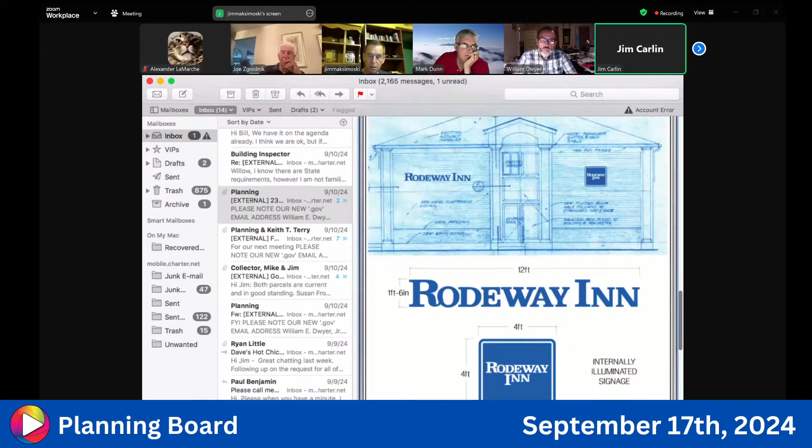I thought that's the old Rodeway. Yeah. I think the new one's more horizontal, as I recall. The new one is a quantity of one sign on the building at 37 square feet, and one road sign at only 25 square feet.

The road sign, we're still seeing. Can you see it? We're still seeing the old Rodeway.

I got two computers. I got a Mac, an Apple, and then I got my regular, what you call it, IBM compatible, and I'm not used to the Mac, so. Yeah. I've got the other two, but I'd have to figure out how to turn them.

They're 90 degrees. Okay, now can you see the Rodeway sign? I mean the TownePlace sign? Yeah. You see the TownePlace road sign? Yep, yep. And that's 5 foot by 5 foot.

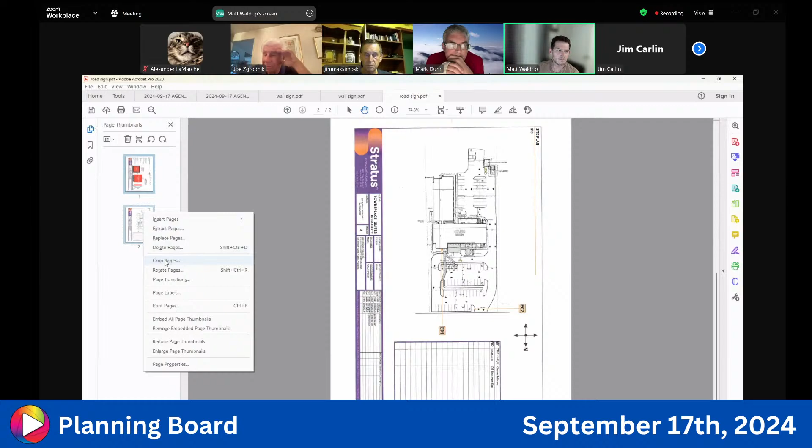Okay, yep. Give me one second. I'll open that one. Okay. Is that it? Yep. 5 by 5.

Oh, sorry, hold on one second. One's internally illuminated at 25 square feet, correct, Jim? Carlin? Yes, right. And there's a note on it, setback from street 35 feet 6 inches.

No, that was when the other street was there and we were taking photos for a survey and we put a stake in there. So they could do a little sketch and also a dig safe stake. So can we just confirm how far back from the street you are? 15 feet, 15 feet from the right of way. Yes.

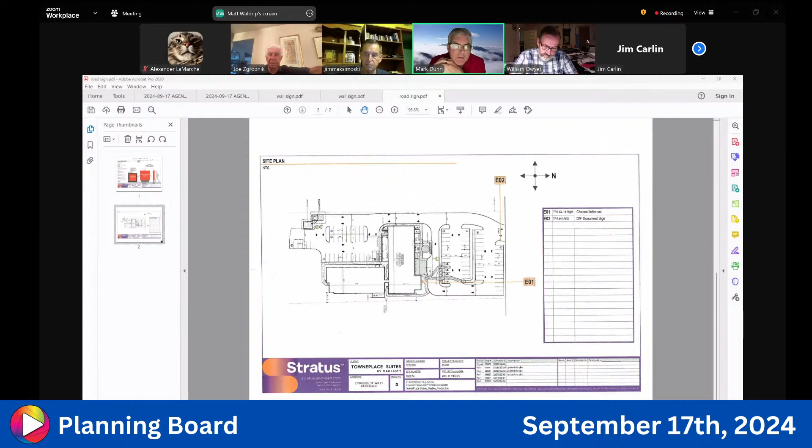I'm just the middleman. You know, where's that elevation? That's back in the wall sign. I don't know if you can jump to that one, Matt. The other tab. Yeah, we can scroll up to, so is that below the roof line?

It's like it might be too high. Well, there is a roof there. Oh, all right, so it's not just above- that is a peak roof. Okay, yeah, it's like an attic. So it's not that it has to be below the eaves, it just has to be below the top of the roof, okay?

Now, you guys wouldn't give 3 square feet because we gave a bunch of square feet away on the road sign, or? We don't have that authority. Okay.

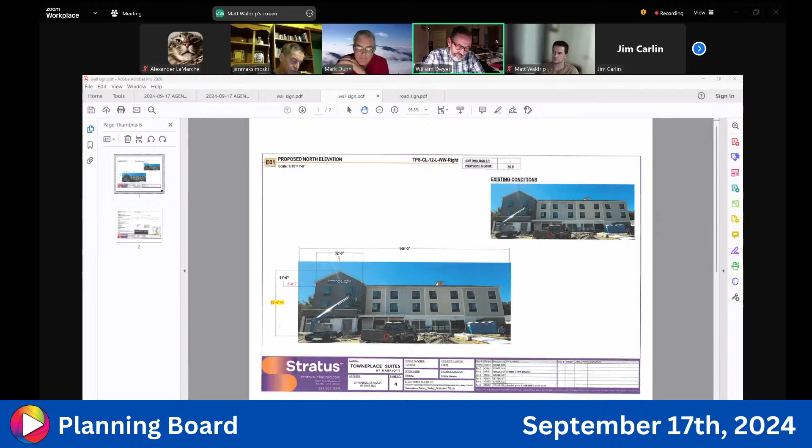All right, so I will go back and give them some new sizes. Okay, you know where to find us. Two weeks. Yes, sir. Yep. All right, thank you guys for all your help and sharing that stuff, because I have no idea what's going on.

Okay, let me just check one thing. Yeah, two weeks, that's right. Yeah, that's the first, right? Next month's a five-Tuesday month, so we will only be meeting twice, even though there are five Tuesdays. Okay, so October 1st. Yes.

Thanks, guys. Thank you. Okay. Next up was Keith Terry. Are you here for the public hearing? Yes, I've got the public hearing. Okay, review of the application of Safi Properties. All right, then you're on the agenda, so we'll move on with office hours.

Amy Jones. I'm just sitting in for Dave's Hot Chicken. Yeah, me and Amy will tag team this one if that's okay. Okay, well let's see who else is up. Ryan, you're up for Dave's as well? Yes, sir. Okay, well Amy's on the list next, so you're all up. Awesome, good to see you guys again.

Here to present, we've got Dave's Hot Chicken's drive-through menu package. I'd like to present that and share my screen if that's okay. Go ahead. Everyone see it? Yeah.

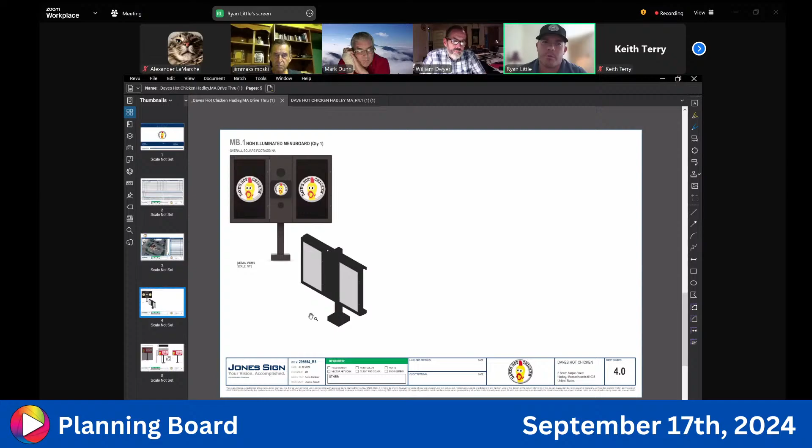And this, we were presenting to match with the goosenecks, but just wanted to throw that out there if an illuminated sign would be accepted. If not, we're going to go with our plan with the goosenecks. Now, the actual menu itself could be illuminated, however the signage cannot be illuminated. So the two, like you've got the Dave's Hot Chicken there, that can't be illuminated.

Yeah, no, that's just a placeholder. I don't think there's even going to be a chicken head logo, it's just going to be the menu. The menu can be internally illuminated, we have that in various other places. Okay, as long as there's no logos - obviously there's some kind of sign there, but as long as it's not an actual sign, but more just a menu board, then it can be internally illuminated.

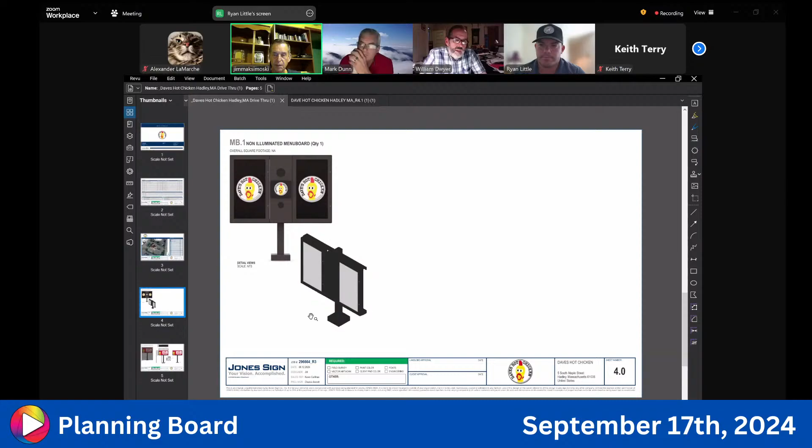Does the board agree with that? In general, yes. Can we just go back to the location though? I want to see how it's oriented. So which one is MB1? MB1, it's going to be located... how is it going to be facing? Towards South Maple Street? Yes, sir.

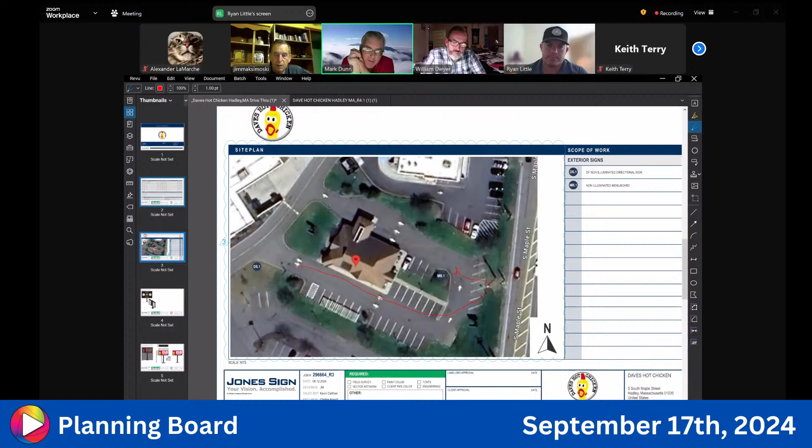Okay, so traffic comes around the curve and they place their order there and they pick up the order at the window. Yeah. So they're stopping basically where that arrow is. Correct. And so the board is parallel with South Maple. Only thing about the internally illuminated board, it can't be too bright that it infringes on the traffic on South Maple Street.

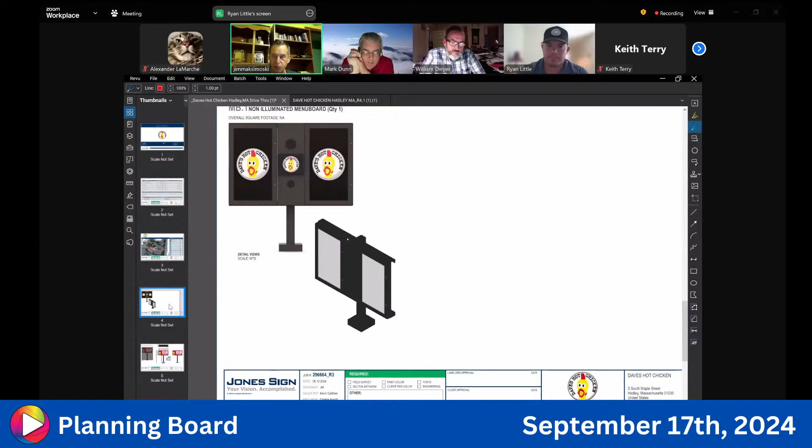Noted. Yeah, because you're facing South Maple Street and you're not far from there - maybe 30 feet off of the street - it's going to have to be very dimly illuminated. Okay, I would say, if you were to turn the sign, go back to that layout - if you were to turn the sign so that it was basically on that little green space and parallel with, or perpendicular to South Maple Street, then you may not be as much of a problem. But I'm not going to tell you how to run your business, I'm just talking about lighting infringing on the traffic street.

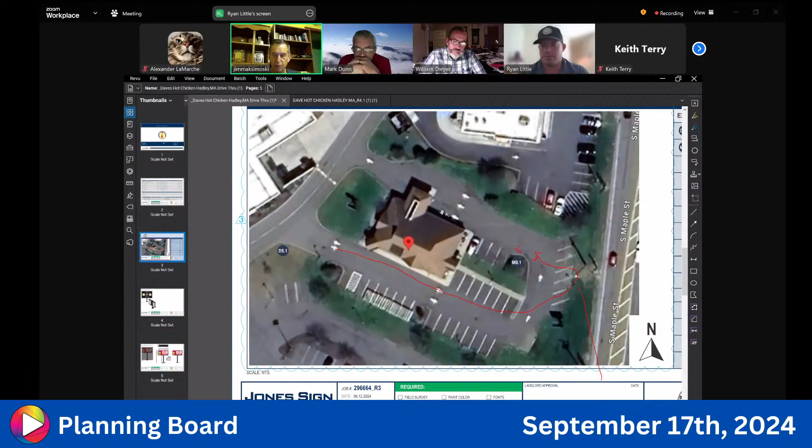Right, gotcha. So maybe if it was more parallel with the building? Right, it could be brightened up a little more. Yeah, that's what I'm guessing. Yeah, if you had it with the menu facing north at that location, then parallel to the building. Okay, honestly we would probably make those adjustments as well, that might even help with the flow.

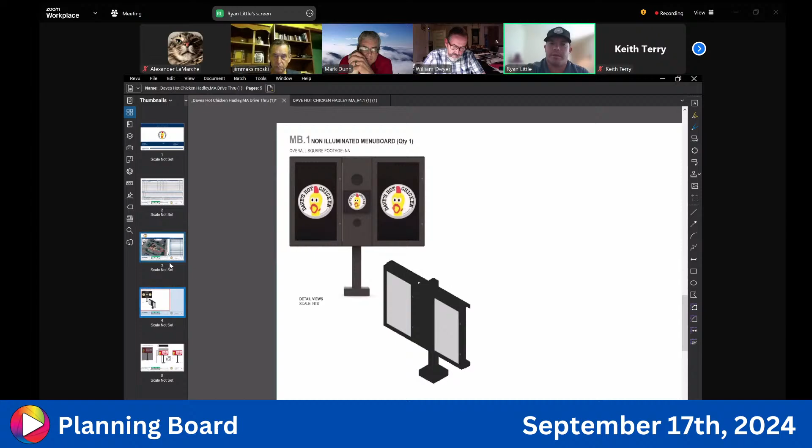But either way, you guys are okay if we go with an internally illuminated sign for just the menu boards, no logos? Yes. Great.

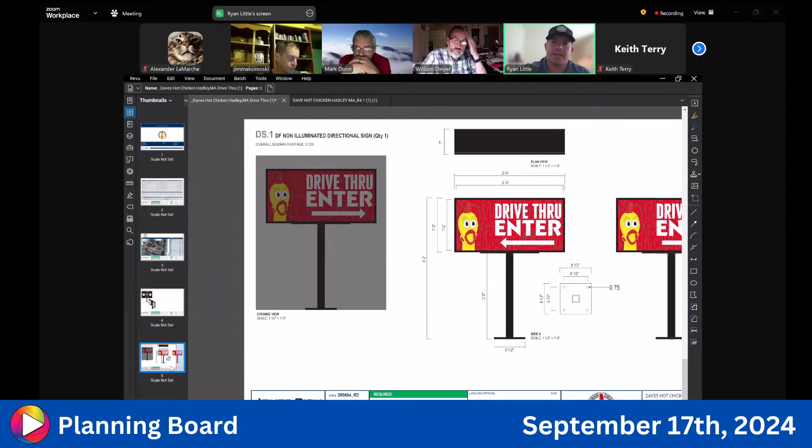And then the other side is directional, as we enter the complex, DS1. Okay, we approved some directional signs for you already the last time you came through, so I don't have that package handy, but how does this differ from what you showed us a month ago? Give me one second.

Is it illumination, or is it no illumination at all? Non-illuminated. Can you guys see my screen?

Yes, and that's a 15 by 30 sign, 2 feet off the ground. It looks bigger, but it's actually not that big. And then same thing too, we can take the chicken head logo off that as well.

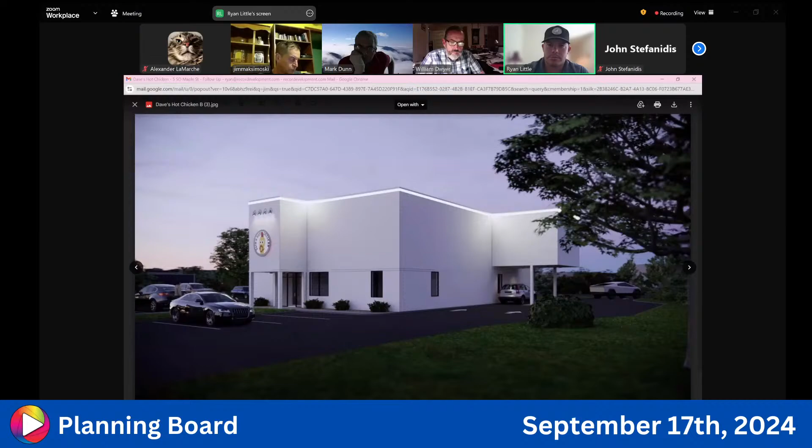You can leave the chicken head logo on it if you wanted. You guys see my screen? Yes, this was the renderings that were approved.

I'm gonna have to go back and look at my correspondence for the directional. They were the same, Ryan. They weren't changed. Okay, yeah, they weren't changed.

But the point is, if you want to have the directional say drive-through, that's fine, but you don't get an extra directional at that location. Oh yeah, no, absolutely, only one directional, leading people into the drive-through.

And your cornice is rendered the way it's rendered, but it's actually indirect. So really, the only change we're adding today is the menu board. Right, correct, for the drive-through.

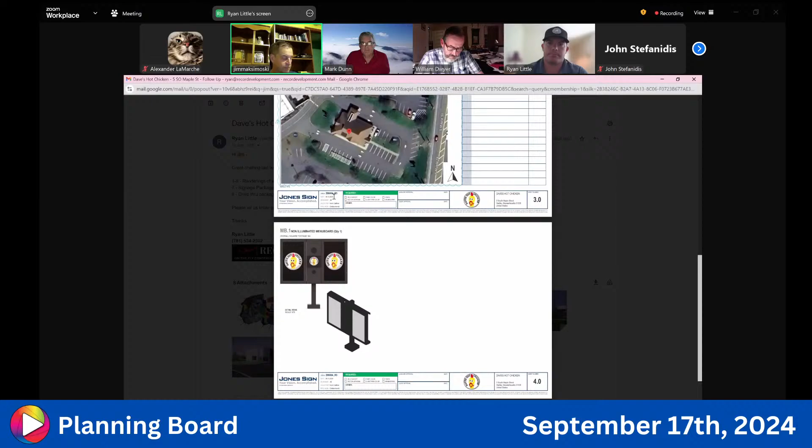No question for the gentleman. Make a motion to approve the menu board facing north. Second. Motion and a second, any other discussion?

Is that where we ended up, or are you considering north? Are you okay with north, Mr. Little? We are okay with north. Okay, all right.

And internally lit. Yes, okay. Yes sir, we have a motion and a second. Any other discussion? No, hearing none.

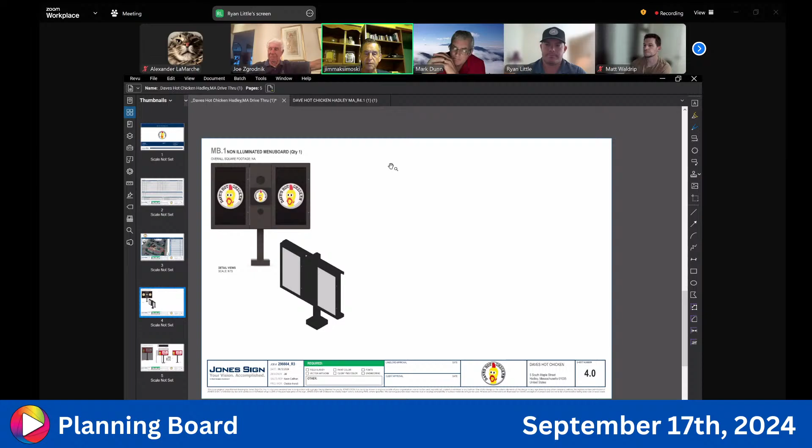All in favor? Roll call vote. Dunn, aye. Dwyer, aye. Maksimoski, aye. Waldrip, aye. Zgrodnik, aye. Motion is unanimous and approved.

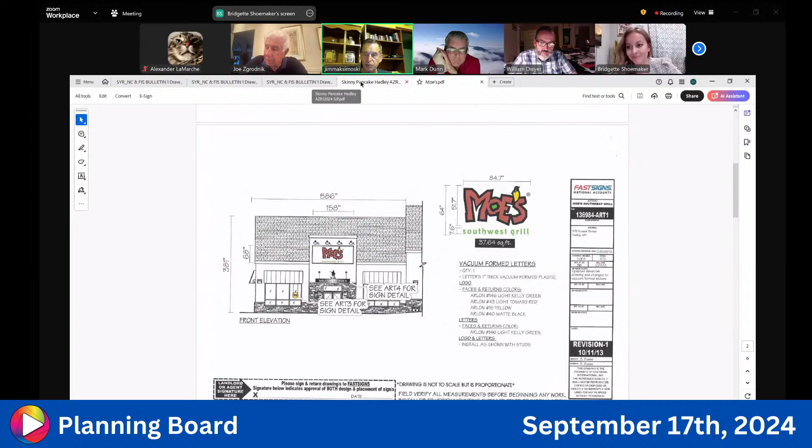Okay, great. For the back of the building we were looking at 22. So, you're allowed 40 square feet on a multi-tenant building, you can have - so that's probably why Moe's never put this one up then. Well, that's irrelevant. You are allowed 40 square feet total, so you can have up to 2 signs on a multi-tenant building. And so you have 38, so you'd be allowed 2 square feet on the back of the building.

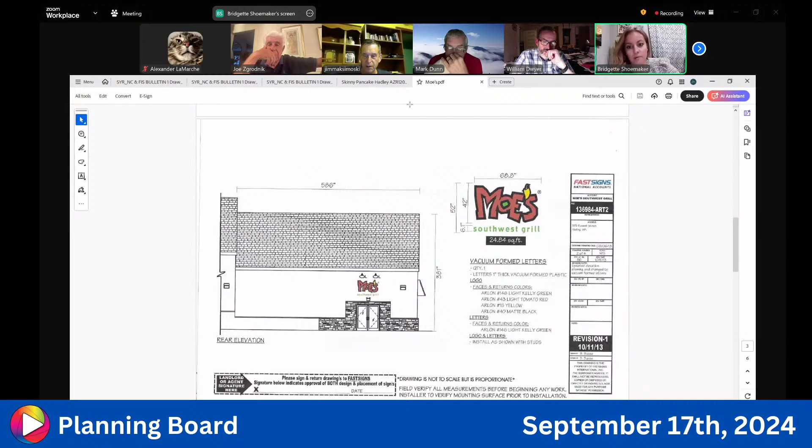So if you wanted to do 30 on the back, however you would like to split up to get 40 square feet front and rear, it's up to you. Okay, well we for sure will not want to reduce the front of the building, because it fits the facade very nicely.

Right. If Skinny Pancake elected to go, is there a variance pursuant option to get the additional square footage that would be needed to just make the sign look appropriately sized on the building? This does face the shopping center, which is why they really want to get their name out there, since they're a new, small business in the area.

Yeah, there is on paper, but you don't have any grounds for asking for it. You don't have any hardship. It's unique to your property and not otherwise affecting similar properties in the district. In other words, the appeals process won't just grant arbitrary and capricious requests. You have to prove hardship.

If I was able to present to the variance board and prove hardship, is that something that you all would agree this sign is appropriately sized for the building? I just want to get an idea of scale, if Skinny Pancake wanted to pursue that - if you could show genuine hardship for your property, which I don't quite see, but never say never, then the planning board would not stand in the way if you had genuine hardship.

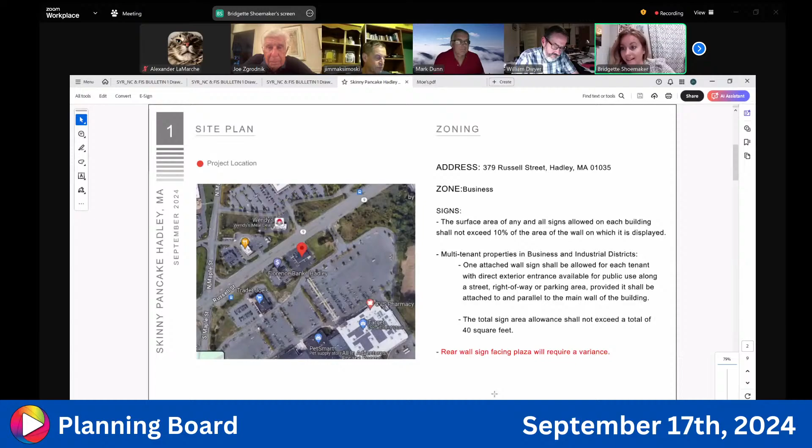Okay, so then the only other item - like I said, we're replacing. Is it here? So this is what the freestanding sign used to look like, and this is what it would look like with Skinny Pancake. It's on the existing board - you're just taking up one of those spaces, so that's fine. Yeah, 54 by 97. So it's taking what was Hunt's.

And that's all. Questions, concerns? No, I think in this case we're not going to nitpick about the extra verbiage on the front of the building either. Oh, you mean in the window, the crate? In the windows - Love Local, perhaps coffee, burger, dessert. Yeah, technically it's advertising, but under the circumstances I'm not going to worry about them. Just reach out and grab the eye. Was there anything there under...

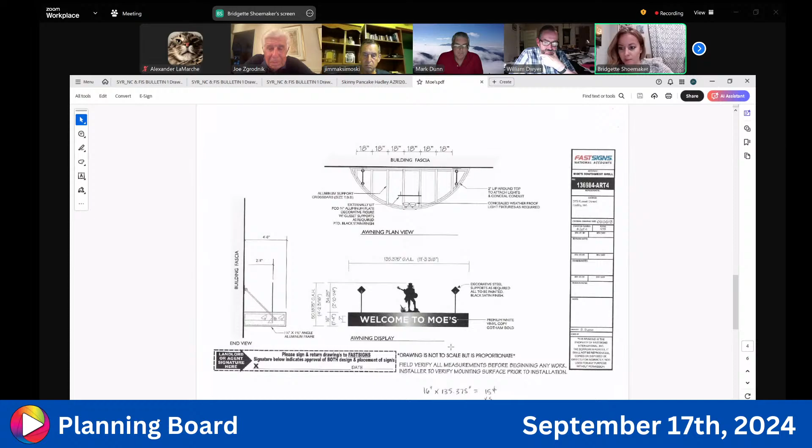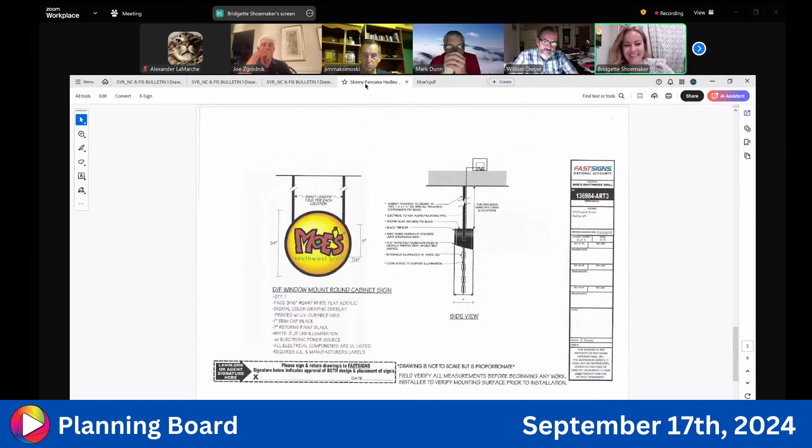Moe's? There wasn't lettering with Moe's - they had this lovely man that stood on the canopy, and they had an illuminated sign in the windows. Oh, in the windows, okay. So it's not really Skinny Pancake's vibe to be so brilliantly illuminated in bright red and orange - they use browns and oranges.

I'll move to approve the pylon sign and the front facade sign. I'll second it. We have a motion and a second - is there any other discussion or questions? Hearing none, roll call vote. Dunn, aye. Dwyer, aye. Maksimoski, aye. Waldrip, aye. Zgrodnik, aye. Motion passes unanimously, 5-0.

Just out of curiosity, Bridgette, what exactly does Skinny Pancake sell? What is their menu? Crepes. Is it pancakes? Crepes. Crepes, crepes - okay, it's crepes. Yeah, Skinny Pancakes are crepes, very, very thin pancakes. You'll definitely have to check it out once they open. They have a full selection of sweet and savory - I'm particular to their peanut butter and bacon one, which sounds weird, but it's really good.

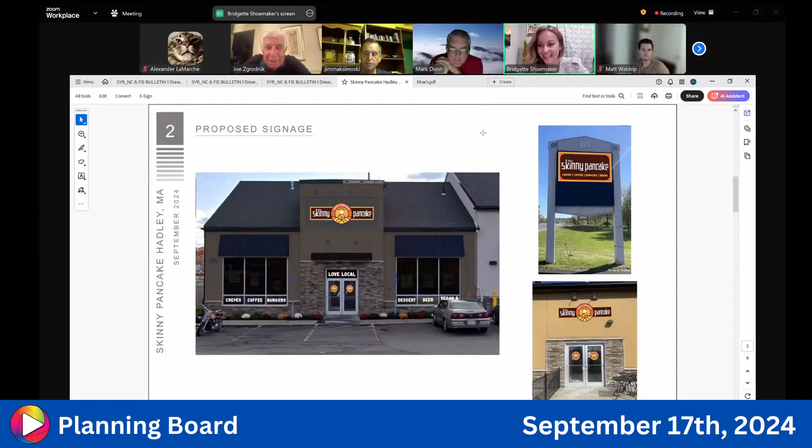Okay, very good. There was a creperie in Amherst. All right, motion passes, it's set, you're all gone. Thank you. Okay, thank you. Yeah, bye-bye, have a good evening. Good night, yep, bye.

So let's see, next in was Cyrus. He is here for the public hearing.

Mary Campbell is here. Did you just want to see what's going on, or did you have other questions? I passed in the address labels and my fee, and just wanted to make sure it's scheduled. Yeah, you're all set for the October 15th public hearing. Today the envelopes went out, everything went out in the mail, and the new notices are in the newspaper. You're all set. Okay, thank you very much.

That's the home occupation, the 139 Mount Warner Road horse riding lessons application.

Hey Bill, this is Tony Chuber. I had another signage question. I don't know if you got it, we're working through the list. I just want to make sure I didn't get dropped off. Thank you, no, nobody gets dropped off our list. We may be here till midnight, but nobody gets dropped off the list if you stay.

Next in was Mark Wagner. Anything to discuss with the planning board, Mark? Bill, we talked earlier today, I'm just here to observe. Okay, right.

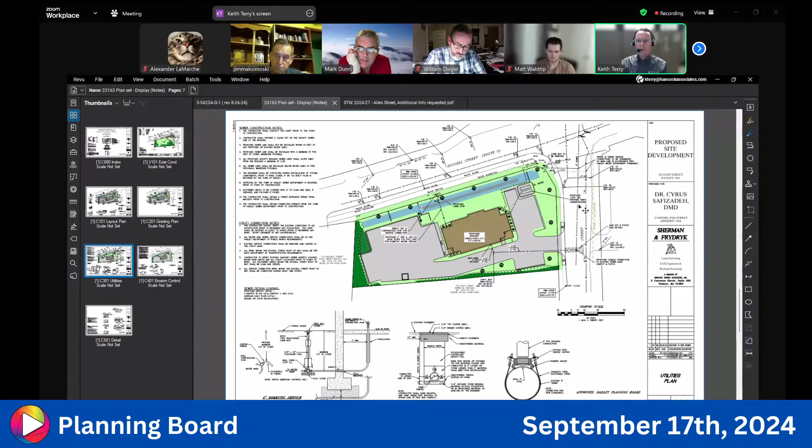As I was going to demonstrate, the utilities: we have a sewer connection into East Street, that's the proposed sewer connection. We have underground electric coming off the utility pole along Russell Street, and the water main is running along our frontage, so we'll tap our water service from that water main.

I believe that's the outline of the project. I'll open it up to the board.

How deep is that blue drainage area you talked about along the front of Route 9? The sidewalk has a minimum elevation here on the west end of the property of 99 feet, and this area here is elevation 98, so the bottom of that area is just a foot. The sidewalk on the other end of the project is at an elevation of 100, so we have 2 feet from the bottom of the catchment area up to the sidewalk on the east end of the project.

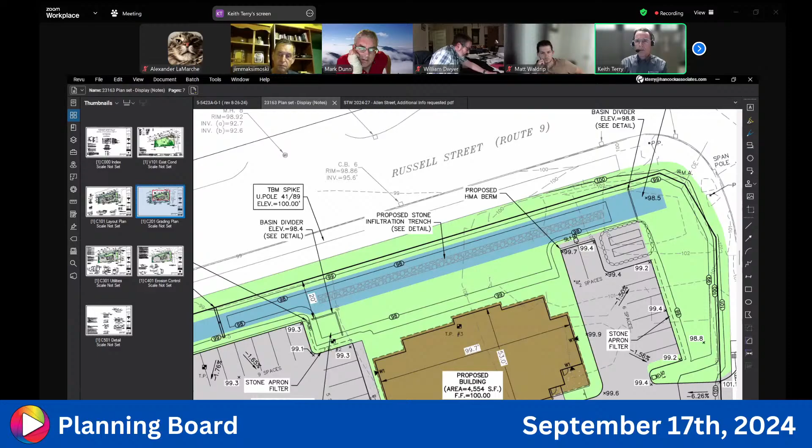Okay, yeah, that's not bad. No, it's very...

We had somebody propose a detention pond one time that was 9 feet below the roadway, and it was only about 12 feet away from the road. And I told them, no, that's a little bit too much. Yeah, that sounds a little excessive. Anyway, okay.

Now, you have frontage on two streets. We like to see parking setback 50 feet. Realizing you're on two streets, that's not reasonable to do on both sides. However, how far are you? Your setback is only about 19 feet from East Street and about 20 feet from Route 9.

Yeah, I believe that's correct. We have 19 feet from the corner of the pavement to our property line. Did they go for a variance to the zoning board of appeals? They received a variance for the building. Okay, yeah, so that probably should be brought up — what was the relief and what was the proposed variance numbers? I have no clue.

It's not to you, Jim, it's to the gentleman presenting it. I'm sorry, I don't have those numbers. So do we know who presented it to the zoning board of appeals? We have Larry Tuttle with Architectural Insights.

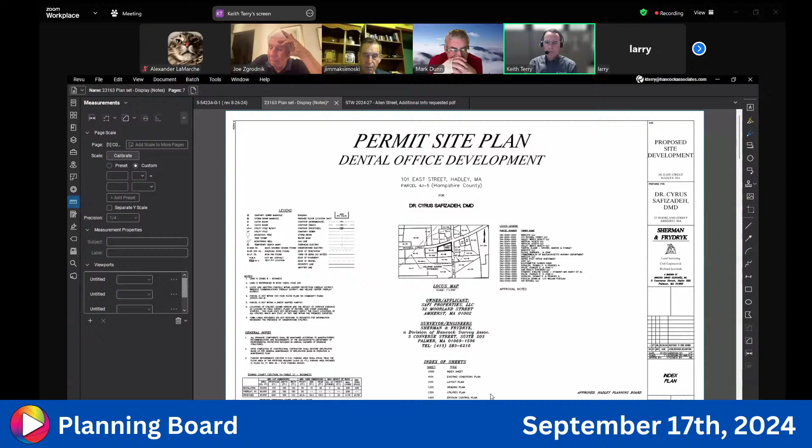We don't have the area of the parking listed on the plan. The parking area provided is 10,900 square feet. The additional pavement that we're reporting is the access drive and the walks.

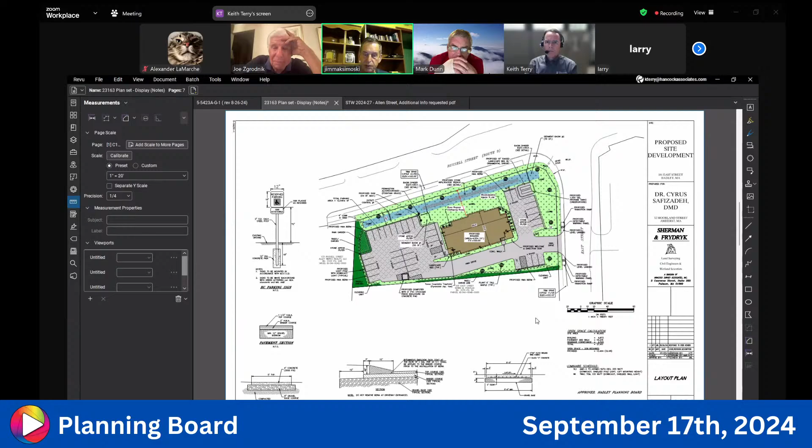Let me explain how we calculate parking. If you have parking spaces, that's obviously parking. You have drive aisles around your parking—can you zoom into the left side of the building? Good, all of that checkerboard area is considered parking, and all of the checkerboard to the right and down below, and even some driving area in front of the parking, where there's actually 4 spaces there.

That would be considered parking. The only thing that wouldn't be considered parking is where you have the HMA Drive, that's just a drive area. But everything else would be considered parking. So this is not considered parking? Right, HMA Drive, that's correct. But all of your checkered area is considered parking area.

So I need to include this access area as parking? No, that would be excluded. Correct. But above the four, north of the 4 spaces, there has to be some maneuvering, so part of the drive there...

You could almost consider—if you drew a line from where it says concrete walk, right there, to the left of your cursor—so we're going to say draw a line from there to the 4 spaces, and then from the little peninsula to the 4 spaces, and that's it. There and down, you could include that area as additional parking, because those are all drive areas to access the parking areas.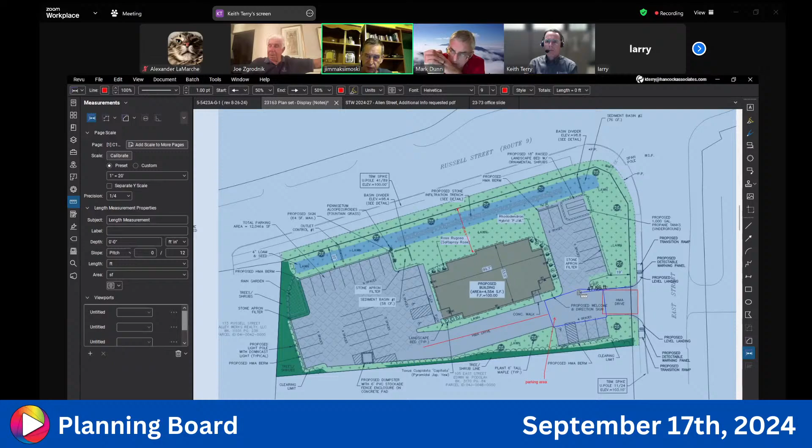That, Jim, I'm not speaking out of turn for you, am I? I'm simply saying that the parking along East Street is too close to East Street. Granted, 20 feet on Route 9, we can live with that because of the swale, the sidewalk, and the taking Route 9 did. However, nothing has changed on East Street to speak of, or if it has, very little. You don't have to be 50 feet, but you've got to be more than 19.

So regrettably, to move that parking requires us... we can throw away 3 spaces down here, but to utilize this space requires us to be closer to East Street.

And again, I'll go back to what I said before. You're a permitted use in a permitted zone. However, the scale of your use may not be appropriate for the size of the property you have. You're putting a big building with a lot of parking on a small parcel. You put a dentist office there, but maybe it's too much of a dentist office.

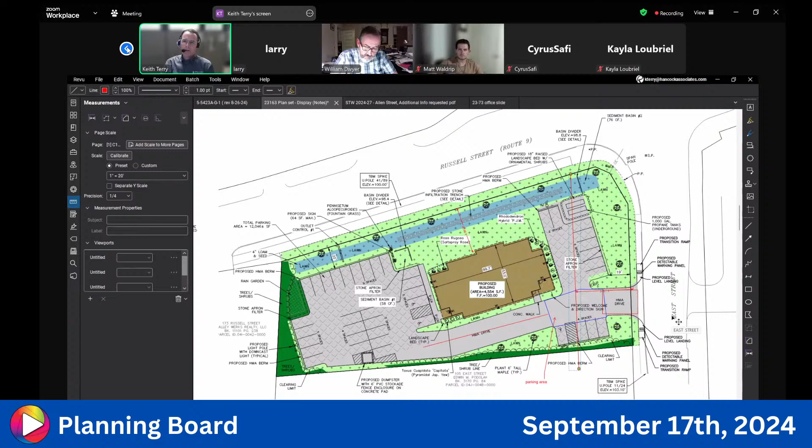Is there any other— obviously I have to speak to the client to determine what we can cram in. Again, I agree, 50 feet would be eliminating too much parking. However, can you pull it back to 30 feet? Can you reconfigure your parking, even if you have to get rid of a few spaces? Can you pull it to 30 feet? Can you redesign your parking a little bit? Can you get 25? What can you get, to be farther away than 19 feet?

If I may speak, this is Cyrus Safizadeh, one of the dentists in the office, and I totally understand the concern. I'm happy to meet with Larry and Keith to redesign this. In terms of why we are designing the office this way, I understand there are many dentists in Hadley, however they are all referring to us. We currently have 2 of only about 5 pediatric dentists in the entire Western Mass region, including Berkshire County, which does not have a pediatric dentist accepting Medicaid. So we're getting, I'd say weekly, 50 to 100 patient visits just from Berkshire County. That doesn't include Franklin County, which only has 1 pediatric dentist, and Hampden as well as Hampshire County. So that is why we are looking at this size building.

And we are definitely trying to squeeze in parking here because our current spot is already having a slight parking issue. We also have lots of little children—our patients are as young as 1 year of age—so we want to make it flow well for them. I'm sure we can go back to the drawing board. I understand the concern would be toward East Street, that parking lot, especially where it gets tight at that 19 feet.

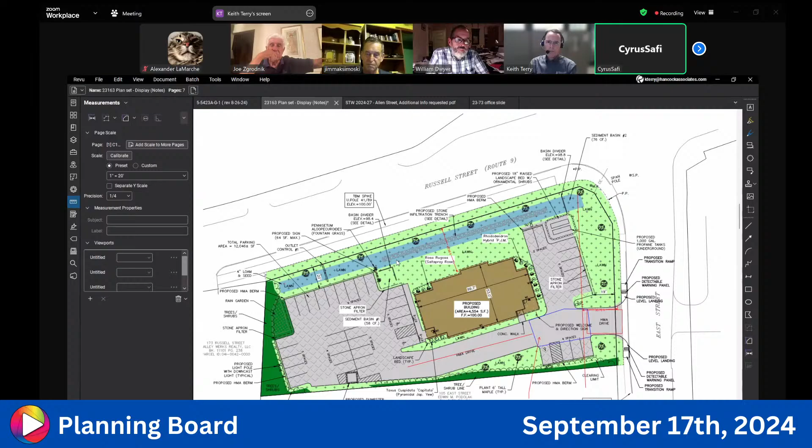Actually, Bill, that's a very appreciated point that I have overlooked. And yes, we are dedicated to providing care. As I said, the reason why we've had this kind of growth is because we are some of the only Medicaid providers. If you start calling around these dental offices in Hadley, you will find that they will not be able to see these children.

So part of that demographic is requiring public transportation, and it's why I was very pleased to see that they have built such a nice sidewalk. So I would absolutely like to incorporate some sidewalk access here. I think that's a very good point that, given the scale of the project, had not crossed my mind. Okay, good explanation. Thank you.

What else? I think that was my thought. Okay, so what would the building look like? Let's go ahead and take a look at the elevations.

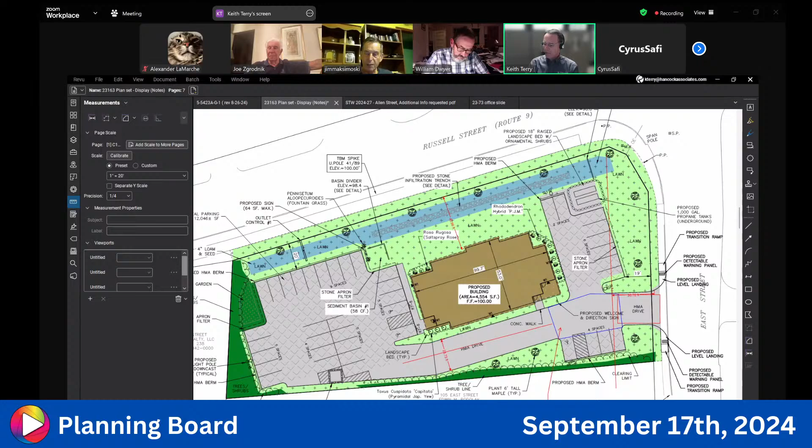Here's the building elevations. This north elevation, I'll zoom in. This is the face of the building that would be facing Russell Street. The south elevation, this would be the employee access. This is the elevation that the drive would pass by. The clients will enter the left end of the building.

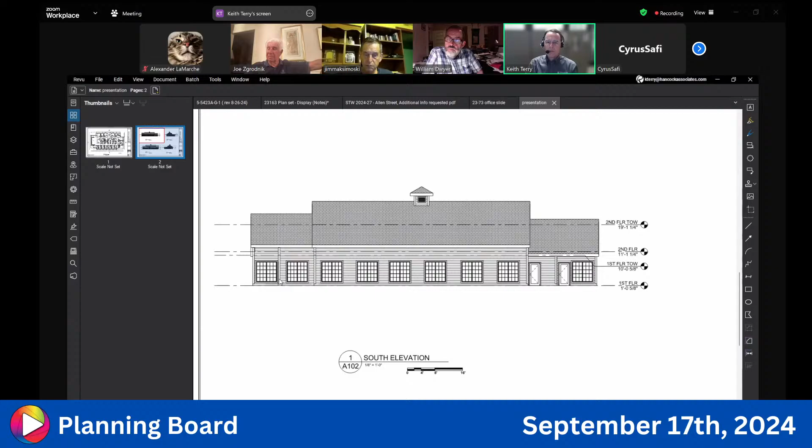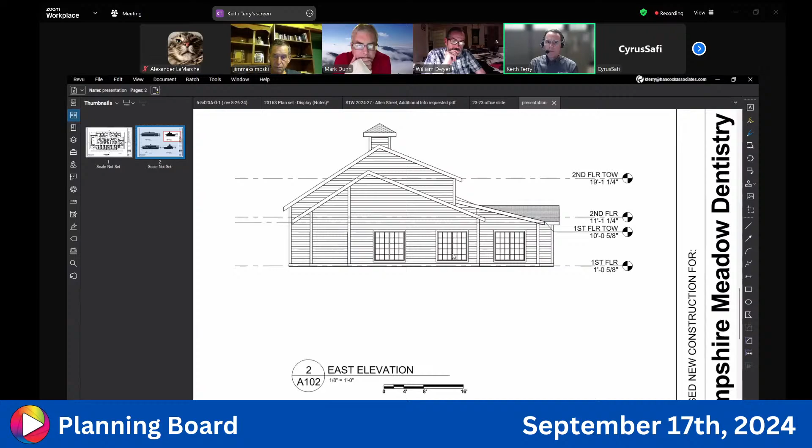This is the east elevation. So you're on East Street looking at the road, the building, and Russell Street would be to the right. So that's the view from the employee parking. Correct, this is the employee parking. And finally, this is the end of the building that the clients would see first.

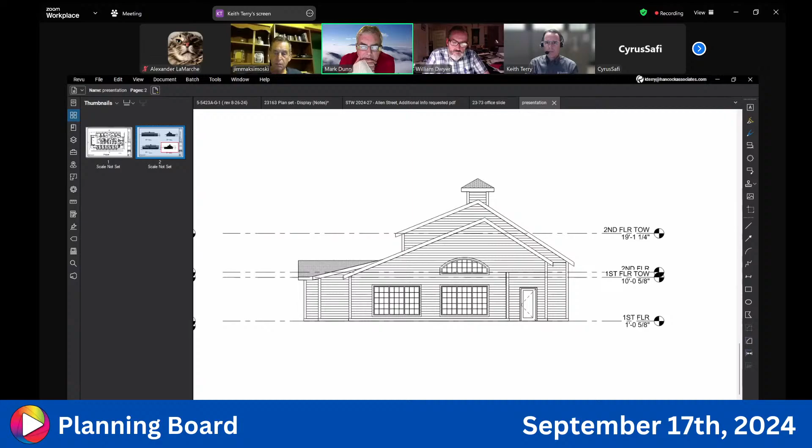So they'd have their access into the building here. This is the west elevation. You have what looks like a clerestory upstairs. Is that for mechanical equipment? Yes, for the most part. It's a higher space, but it is for some of the air exchange.

Well, that's nice that it's not out on a roof. I like that. For the next meeting, could you get an artist rendering of what the building will actually look like, a 3D view from say the corner of East Street and Russell Street, or the Russell Street corner facing the regular entrance?

We actually had submitted some renderings. Let me see if I can pull that up. Oh, okay, that's even better, because that gives you a better sense of some of the coloring and so forth of the finishes.

We're not into signage yet, right? That's later down the line. Cupola on the top.

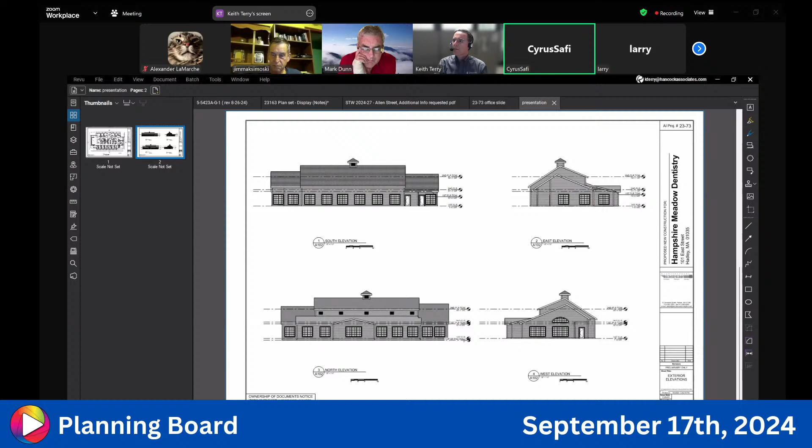I apologize, hold on. That's fine. I found it here. I don't know if I'm able to share my screen. Go ahead. Let's see. It's a little hard to see which one. Here. Oh, you found it. Keith, I've got it, it's just easier for me to share, I guess. Thank you. Okay, I'm sorry, here we go.

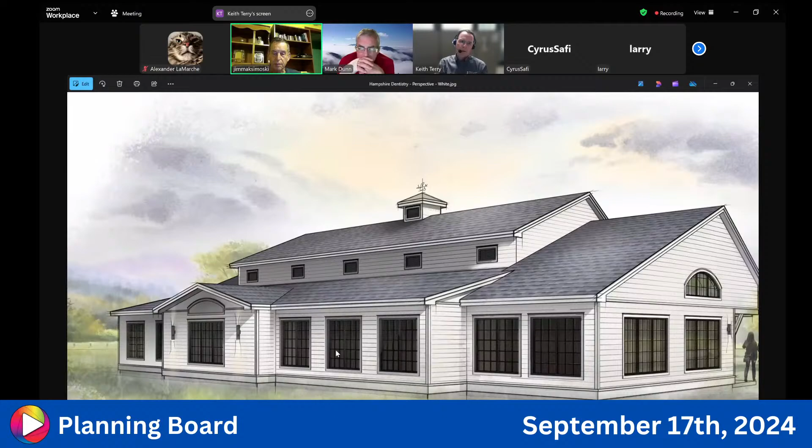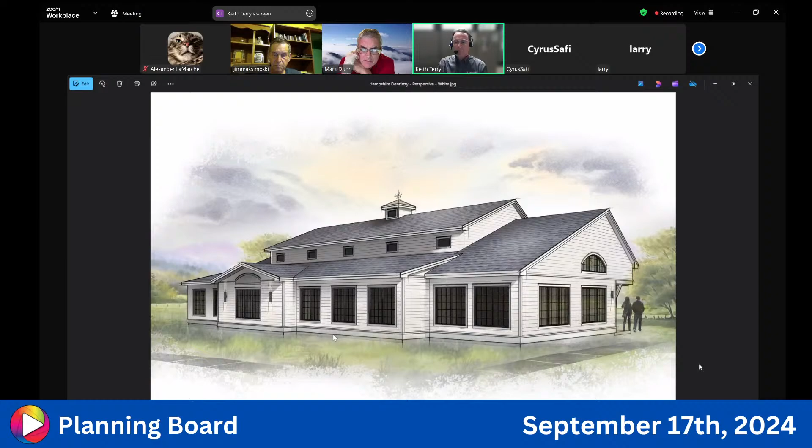All right, okay, so white building? That's looking southeast, right? That's fine. So this is from Russell Street. Yes, and this would be the client access.

Actually Bill, to my point, or your point, that sidewalk, I was assuming that's an access point for people, but obviously on the site plan, it's not something that came to my mind. That'd be a great location for your entrance, because it would steer people to your front door. Yeah, I mean, I know you know the current location, but before there was the sidewalk, I've seen families, mom with 3 kids coming with the stroller across all that grass and everything.

It was tough. Okay, so it'll be a white building like that? Yes, that's the current plan. Okay.

Fine, nice looking building. Yeah. This, Jim, is this an aquifer protection area?

Yes. X-ray solution, no chemicals, all digital. None of that stuff anymore, Joe. It's all electronic nowadays. We don't do amalgam fillings either, which have metals in them. However, as we replace other people's old metal fillings, we'll have amalgam separators to separate that out. When you have that, you become a very small quantity generator, not into the next category by any stretch. You'd have to remove an awful lot of amalgam to get to the next quantity. You're talking grams. Very small.

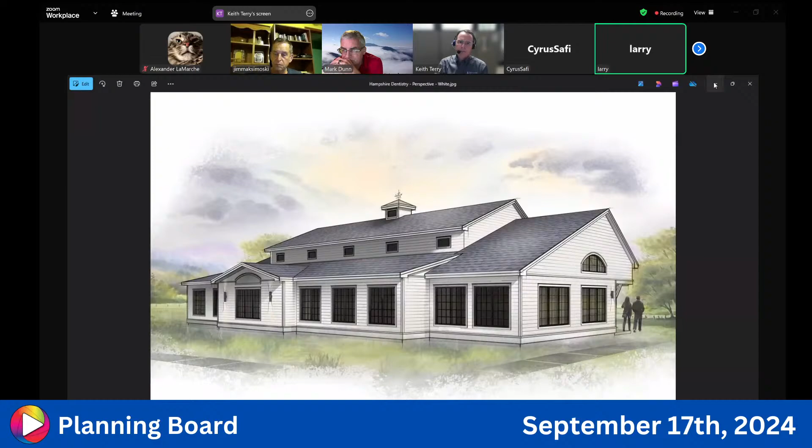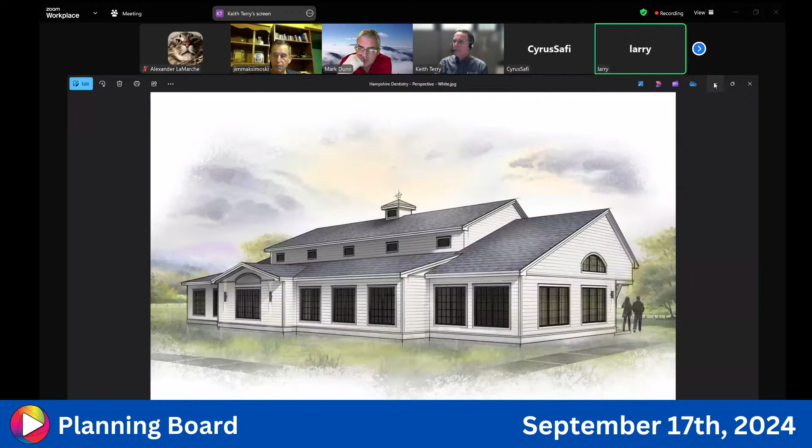Since we have some of that information, what would be the first opportunity? The season is changing, and if there's a possibility of getting foundation work done, we'd want to move on it. We've had preliminary discussions with the building department and reviews with historical. We also have a situation where the widening of Russell has created a physical difficulty, in that a portion of the existing structure is actually in the right of way. Also, the grading relative to the existing grade and foundation of the current building is subject to some issues or problems, unfortunately inherited by the owner.

So the sooner we can move to remedy those, we'd prefer to do that. As far as the next available date, was that October 15th? October 15th. However, as far as demolition of the existing property, you could start that as soon as you get a demolition permit—you don't need site plan approval to do that. Well, I had assumed that, and I'd written a letter to the building department, and he was passing it among the various boards and authorities, and we did have a verbal that we could proceed. I was just making the point that we'd like to remedy the exposure to liability for the owner as quickly as possible.

So the 15th is the next available. We do have two other public hearings scheduled. I'm not sure either will be lengthy, but it could make for a longer evening. Well, I'll speak out of turn—Keith can certainly chime in—but some of the adjustments are realistic and reasonably quick to represent. Yes, we can make adjustments to the plan and meet the October 15th meeting easily.